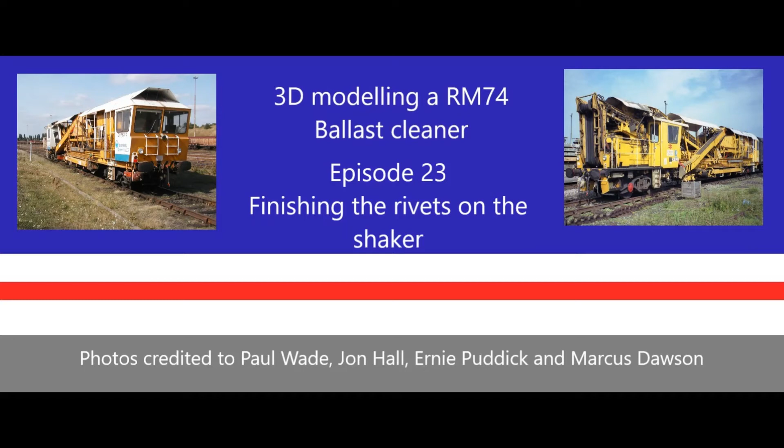In today's episode I'm going to continue on with the RM74. I'm going to go back to looking at these rivets and plates that are on the shaker deck here and putting the lower level of rivets in.

Now we could go back and draw these all individually, same as what we've done before, but we can do a little bit of a cheat to get the majority of these copied in, because they are just patterns at the top.

It's just going to be a case of copying them down.

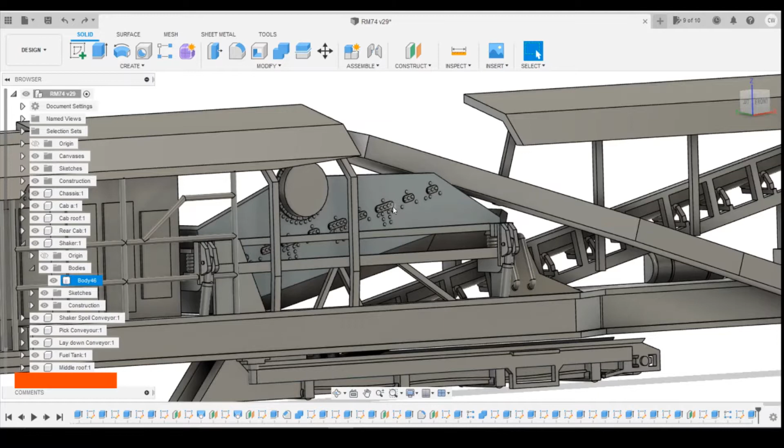Now, obviously one of the compromises we've had to have is the size of these rivets, to be able to print reasonably in N gauge, are slightly over scale, which means these are slightly bigger than what they should be. As a result, this second row down here will look closer to the top row than they actually are on the real thing. This is a compromise we've had to make.

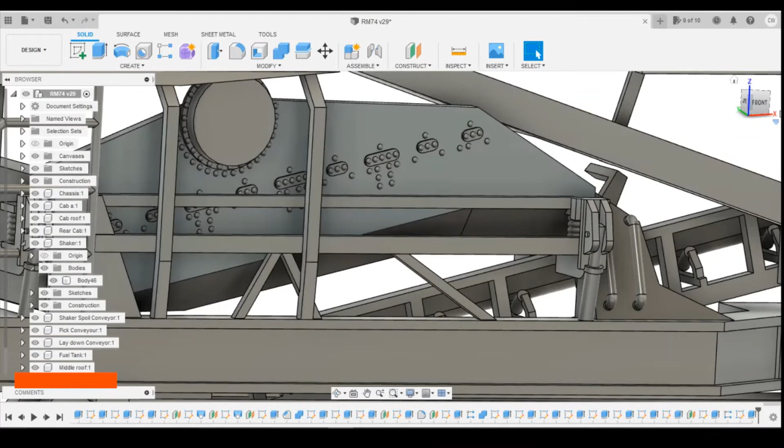So how am I going to cheat? Well, really what I'm going to do is cut all of these off and then create copies. So if we turn off all the parts apart from the shaker deck, so we can see what we're working at, make sure the radio button is selected for the shaker deck, and go modify, move copy.

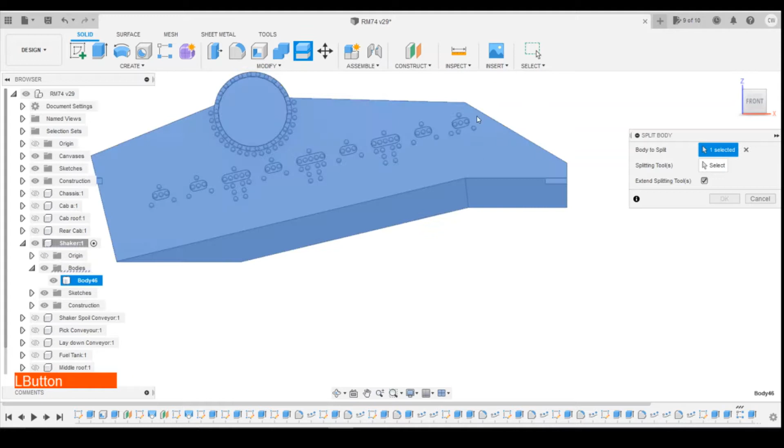Actually I'm jumping a step ahead, split body, so splitting the shaker deck, and then the splitting tool will be the front face here. It will cut all of these parts off, creating new bodies.

And then we can use the move copy tool, select bodies. I'm going to start with this part here.

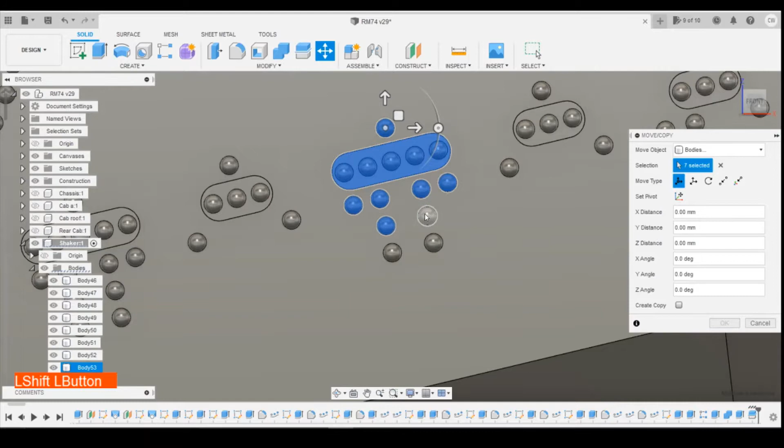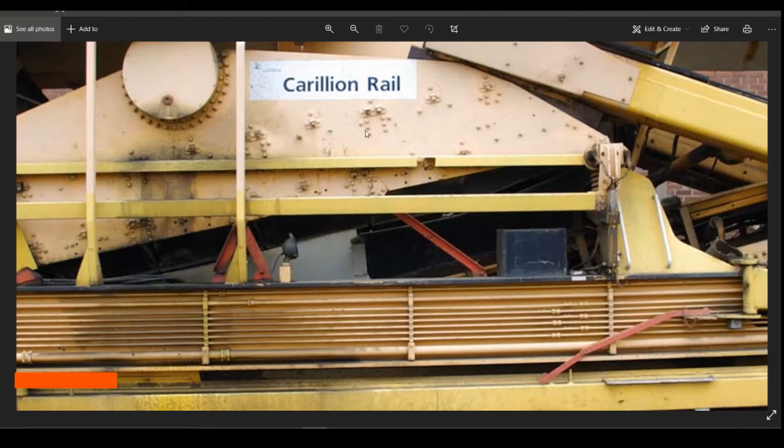I'm going to select all of these as a group, create copy, and looking at the picture, that's the one we've selected, and it's below slightly to the left of the one above it.

So now we can just drag this down. As I say, you can see the compromise here, they're going to be overlapping slightly. So I think I'm going to go with something like this position here.

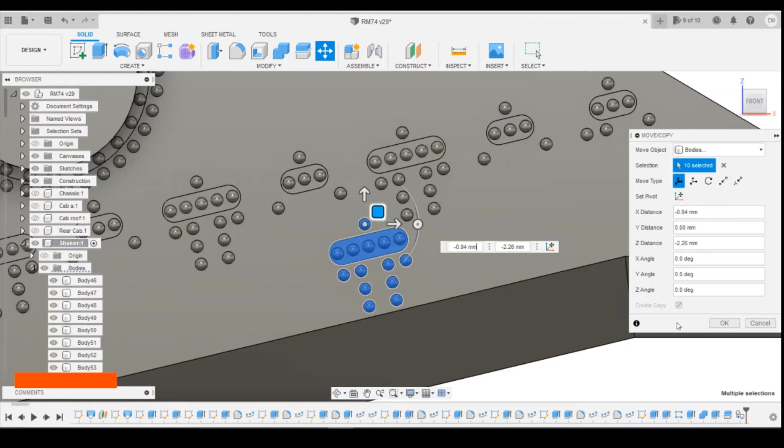So I've come down by minus 0.94 and minus 2.26 on the Z-axis. Once we've got that down in position, we've now got that one copied over.

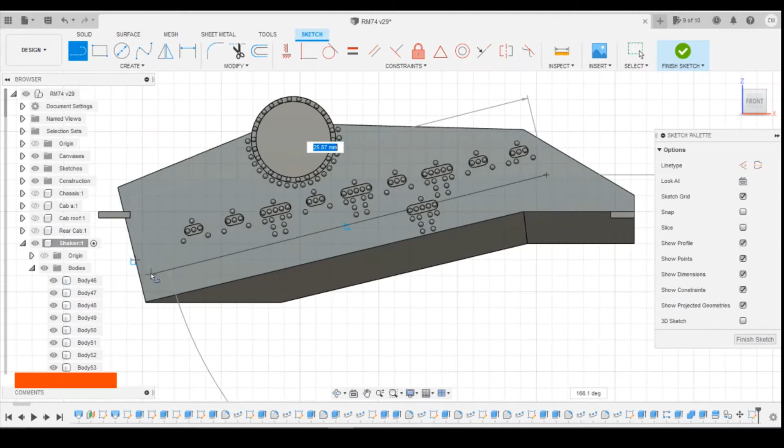Now, to help align all these, I'm going to create a sketch on this surface, and draw a line down like this, going all the way down the model here. I want it 90 degrees to this face here, and I'm also then going to coincide that line.

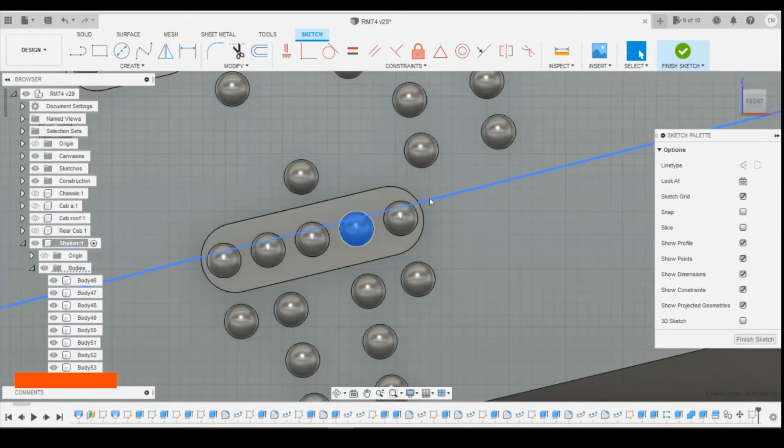Do a point, unfortunately. Let's drag that line down so it's in the middle then. That's the way we're going to go about that.

We put a circle on there, that should be... there it goes. It's pretty much close enough. It's maybe got to go up a tiny bit.

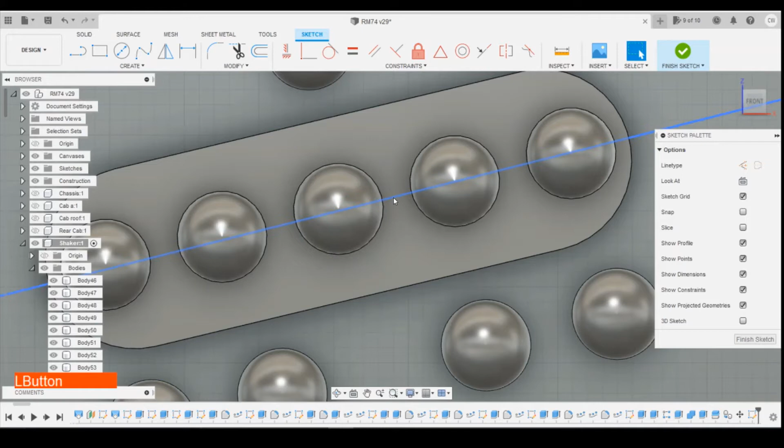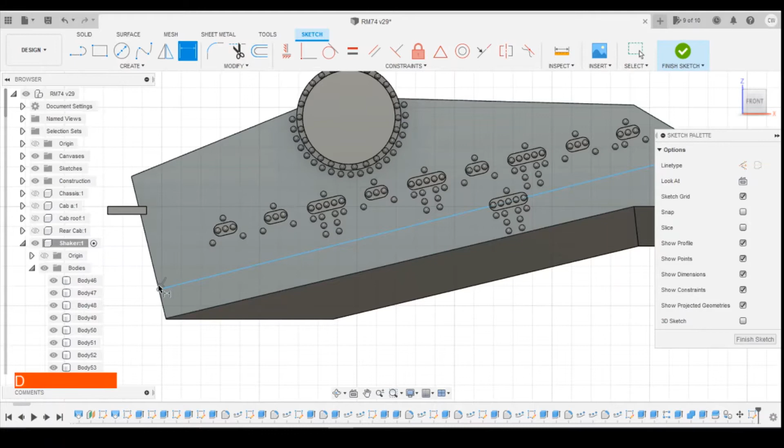So we can define that angle, point there to there, do the same angle, 1.5.

Okay, now what we can do is copy all these down for the ones that we need. So if we finish that sketch, we've got that line then drawn on. So if we then look to the left, what we've got here is the same as above.

I would say that these are all going to be actually pretty much the same. That's that one, that's that one. So actually what we could do is come into this.

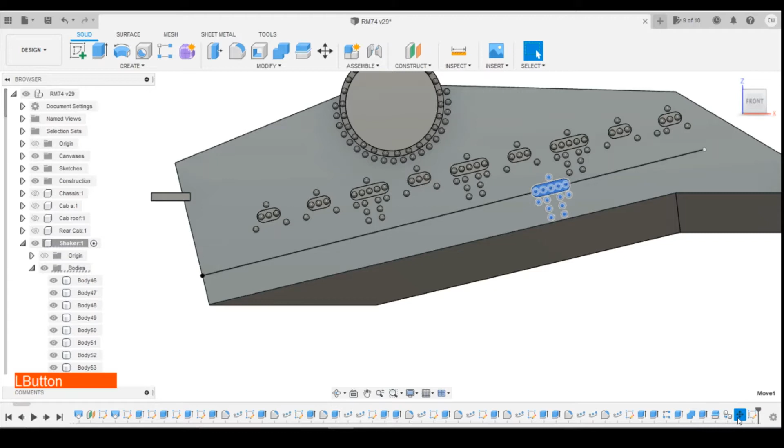And we can correct all of these bodies as well. Won't do that, unfortunately.

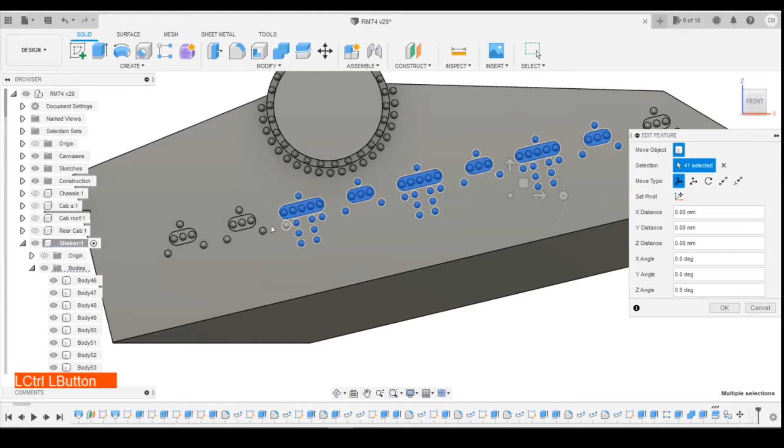Top one doesn't look like it copies. Actually, it might do. Ah, not created a copy.

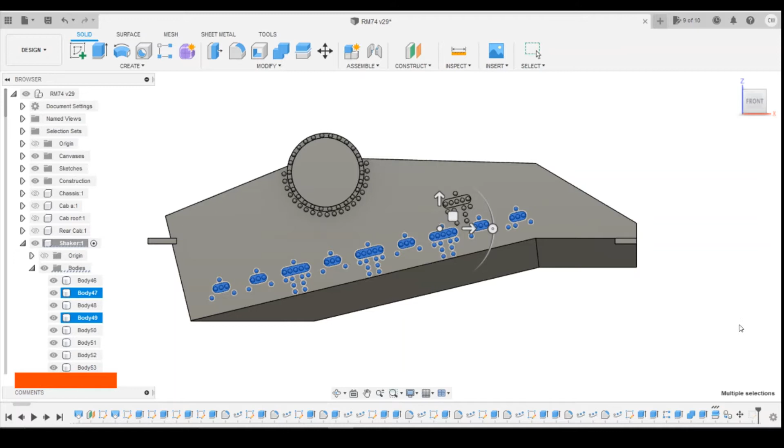Cancel that. Delete that sketch. Delete that new copy. And then we'll go back and do that again.

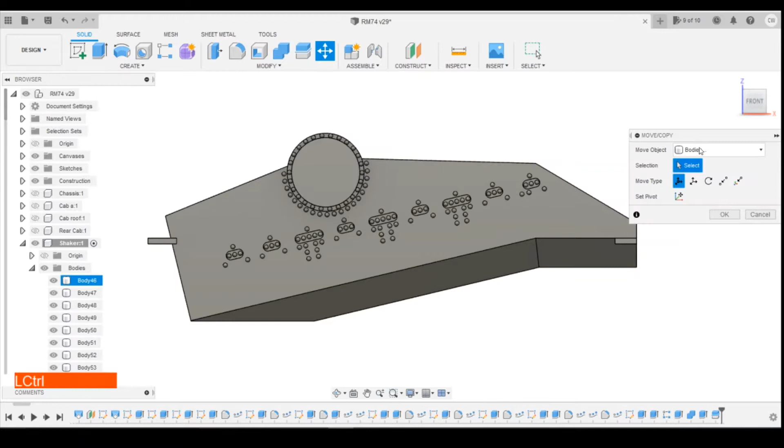So move copy bodies, and then we're going to select all of these bodies again. I'm just holding control down while I select all these.

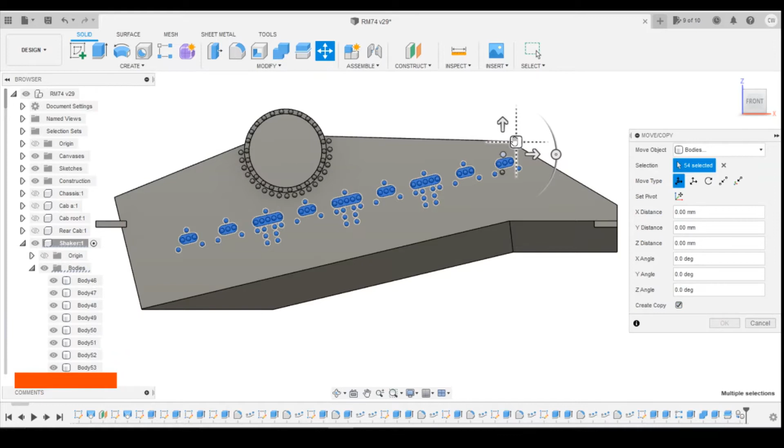Like it, although it's hidden, so it doesn't really matter. Create copy, and then we can drag this down. And you can see it, there you go, it's overlapping again.

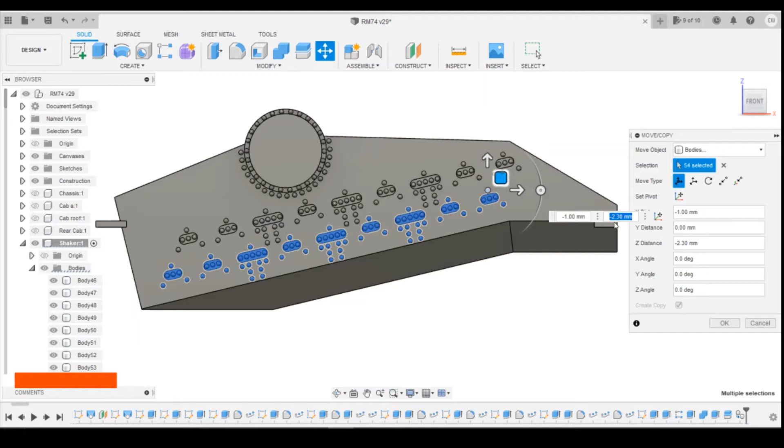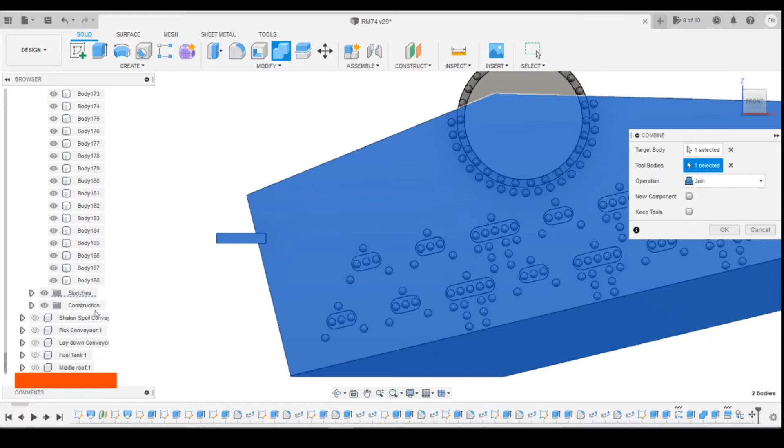I'm going to adjust that position there. Come down 1mm by minus 2.3 now. So a bit of a cheat, but we're achieving what we want. And then if we just combine target body, going to be the original, and then I'm going to select all of this, scroll down, select the top one, scroll down to the bottom, hold shift, selects them all. It's already joined, and then that's all of those joined back on. So it looks a little bit crowded now compared to this, but that's the compromise we're going to have to make to be able to get them to print properly.

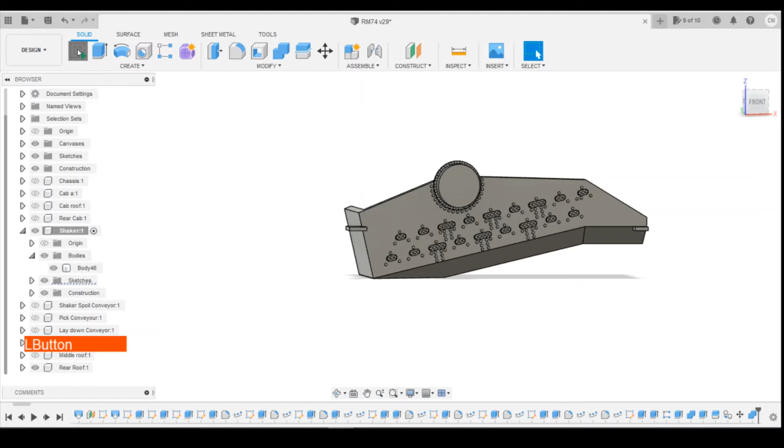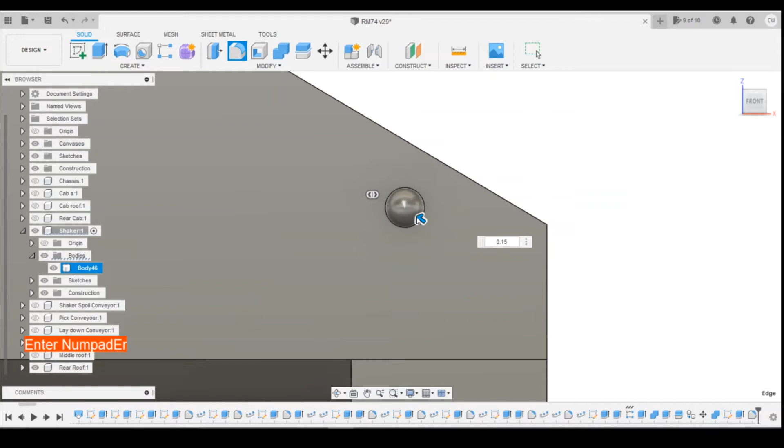Okay, so now we've got these copied over, we've got a few more rivets we'll add in. Looking at this, we've got 4 along this angle here. So we'll create a sketch on that surface, again using the same technique, so 0.3 diameter. Extruding that 0.15, and then filleting off the edge 0.15. We can then do a rectangular pattern of that feature, direction, and there's 4 of them. They've actually spaced differently, so we're doing 2 of them.

Just why didn't that like it? Weird. I'll come back to that in a second.

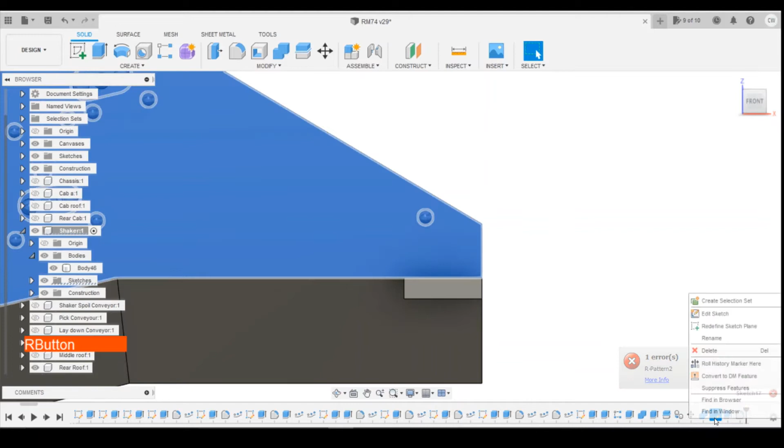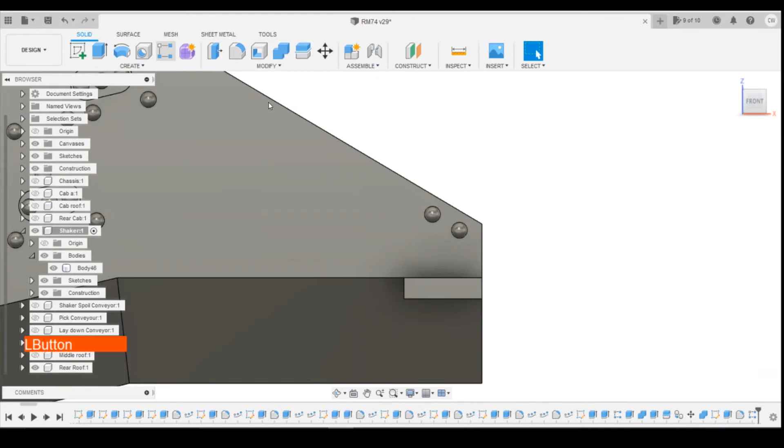Edit that sketch, I'm just going to move this right back to the corner, so 0.46 from that corner, measure height 0.9. Let's change that to 0.45. And then rectangular feature, direction up here, 2 of them. I'm going to go 0.6 on that spacing initially, and then a rectangular pattern, the pattern plus the original item. I'm going to do that up, 2 of them. I'm going to go 2 millimeters.

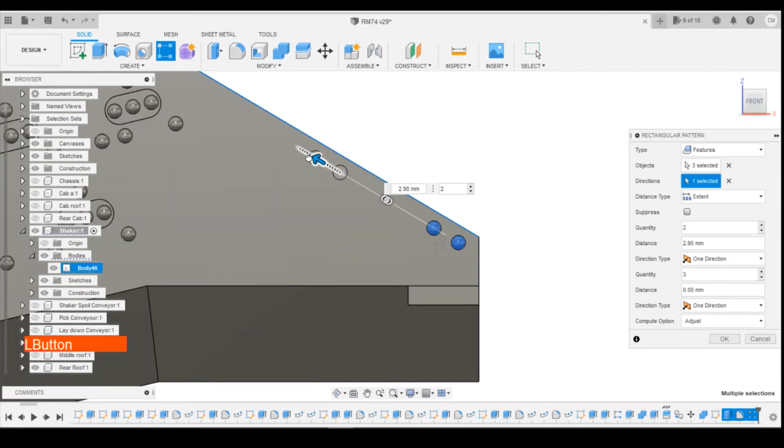Actually, might be a bit more than that. That needs to be roughly in line, these are coming up. So 3mm.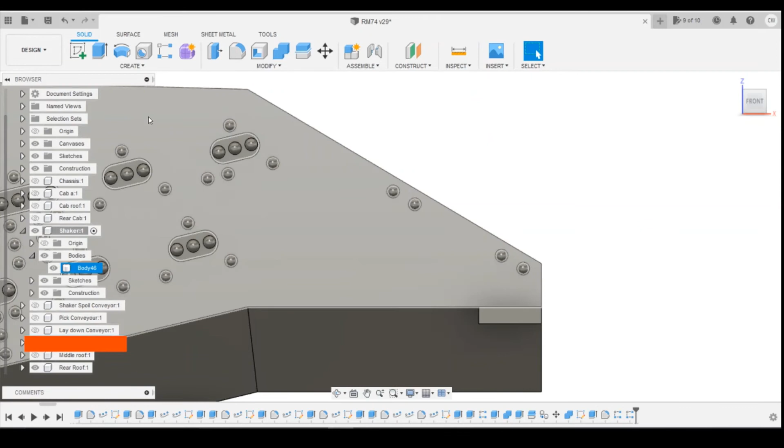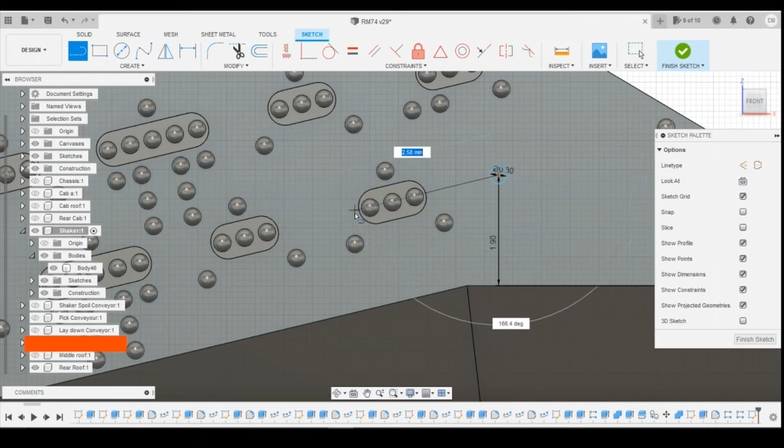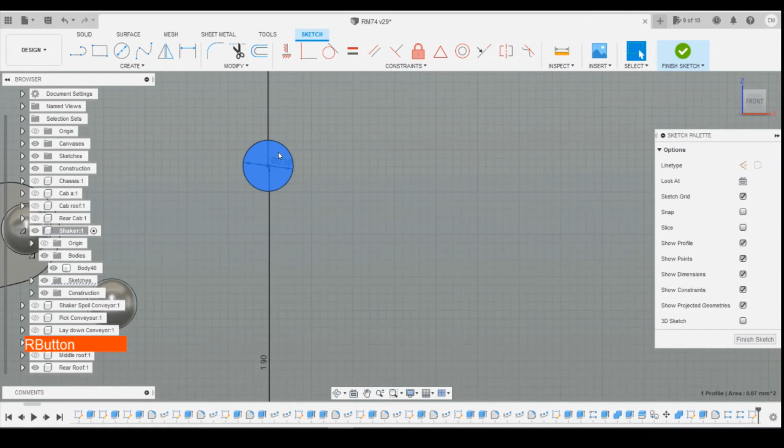Okay, so now we need to add these 3 along here. So I'm going to again draw a sketch on this surface, 0.3 diameter. I'm just going to draw a line from that midpoint down, see if it comes through. These okay, needs to go up slightly. So 1.9. Well, if I'm honest, go with that. Distance from that edge, 6.48. And then same tools for 0.15 out. Fillet off 0.15. And then we've got 3 of those.

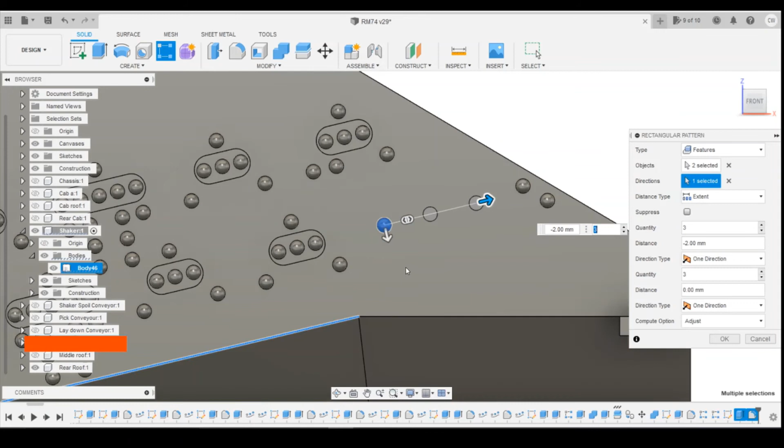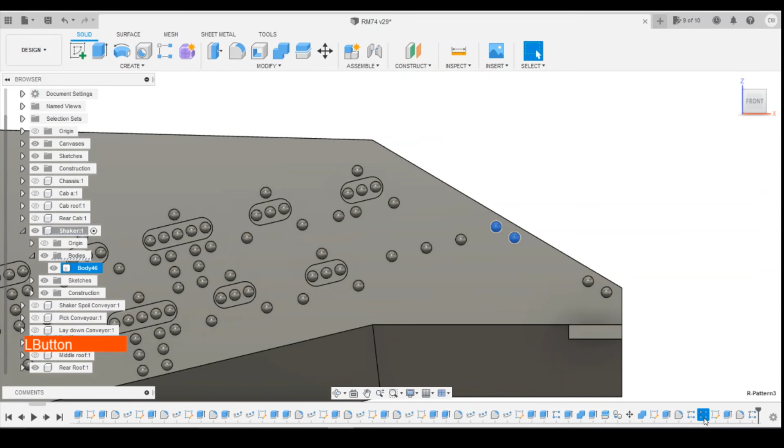So rectangular pattern, select extrusion and fillet direction. It's this way. Not bad actually, it's not brilliant, it's not perfect, but go with that. So moving them across 2mm, 3 of them, and that shows that these need to come down a little bit. So we can alter that pattern and just bring that down to 2.8. There you go, that's better.

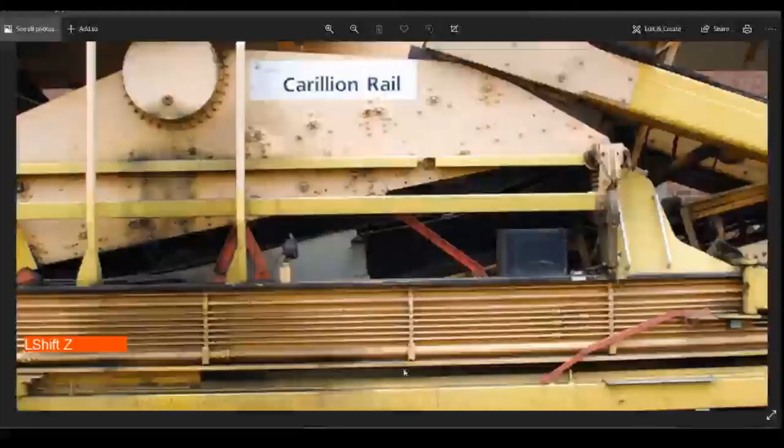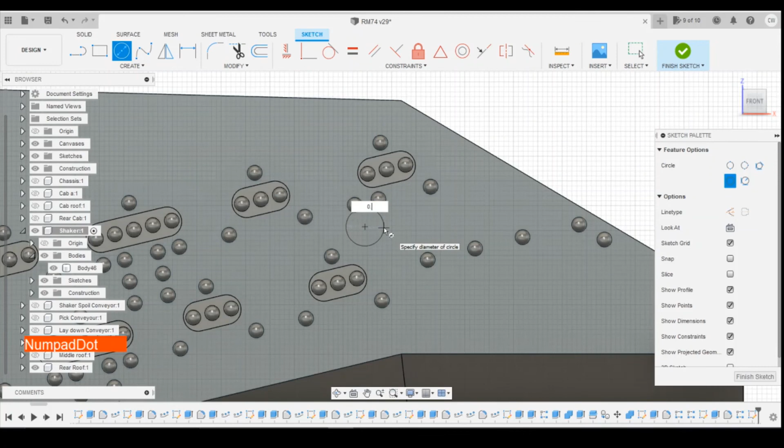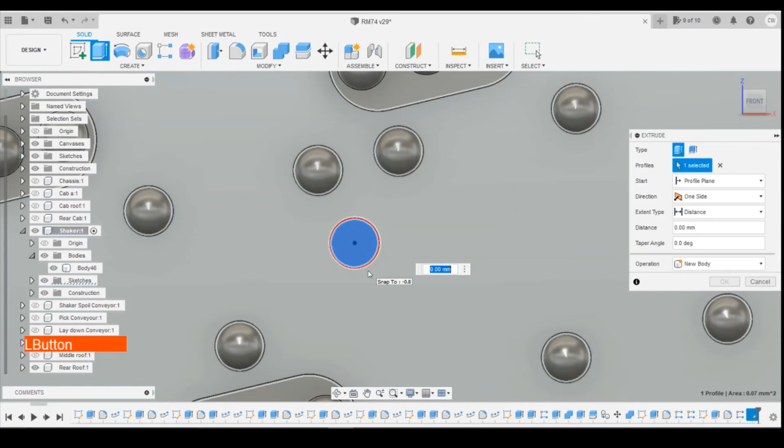Okay, and now we've got these 2 that are sitting here. So again, same thing, got a sketch on the surface. Let's have a look above these, so we're going to go sort of this area here. From that line, it's 0.68 up, and from that point, 2.58 up. Lock down to position, extrude again, fillet the top off again, and then pattern again. Direction, we'll use that surface or edge there. These 2 are relatively close together, so we'll go say 0.4.

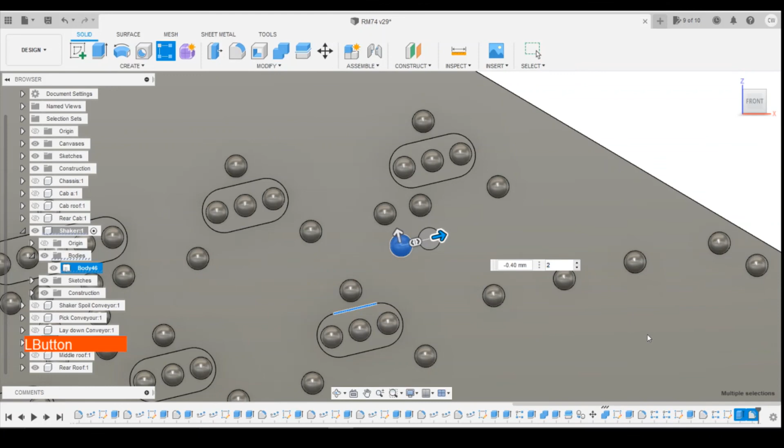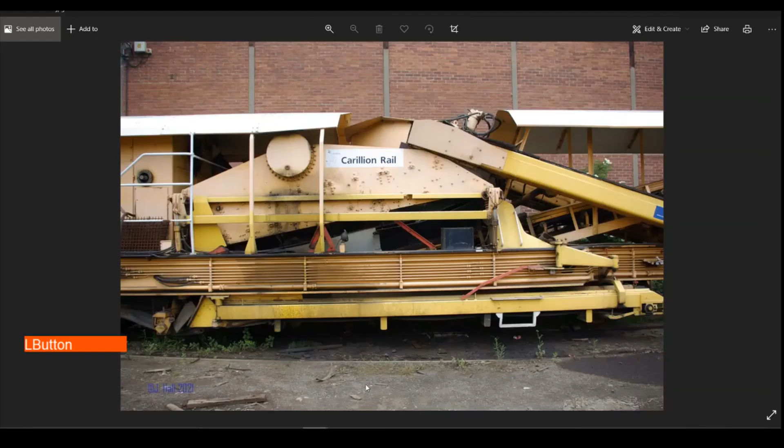So just reiterating again, it's not a perfect solution because obviously these are over scale, but we've got all the rivets that are now on here drawn on. And yeah, I'm happy to make this compromise and go with what we've got here. And hopefully you'll feel the same, and you're able to copy along okay.